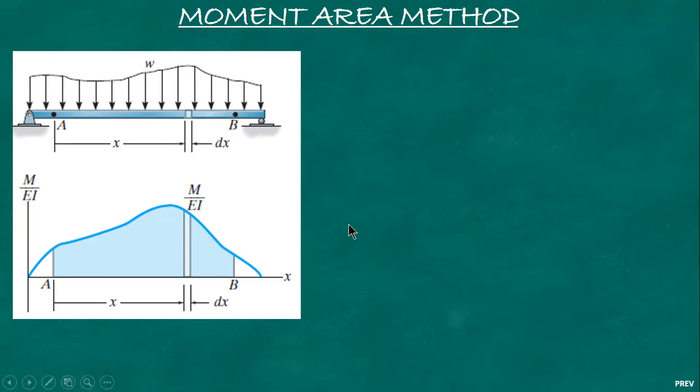So from the derivation of the flexure formula, we obtain the moment curvature relationship.

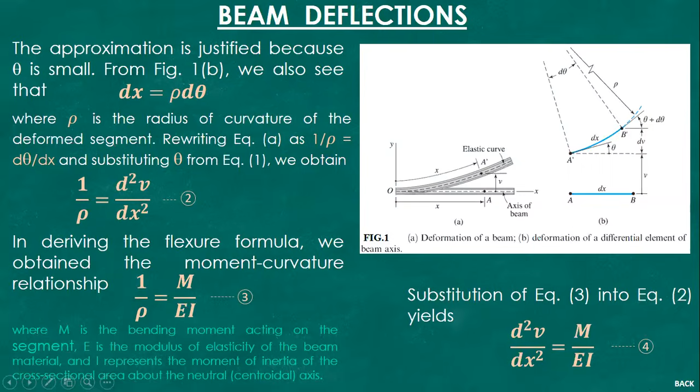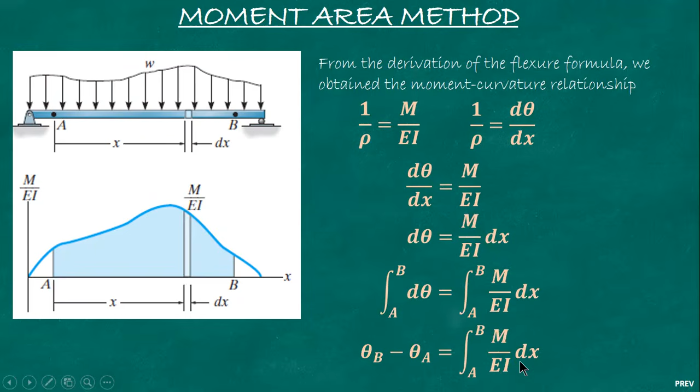Area, right? That's y dx. So integrate from A to B. Theta B minus theta A equals integral of M over EI dx from A to B.

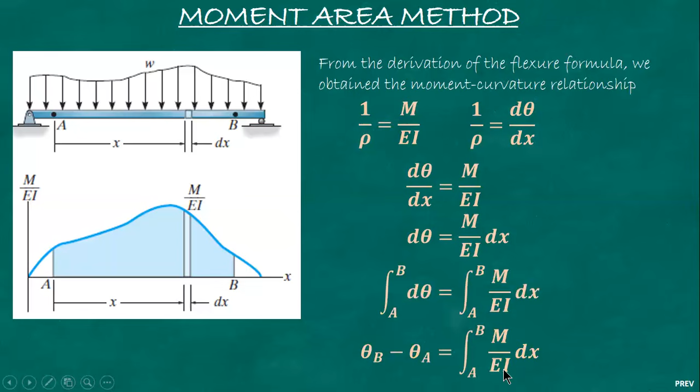So that's theorem 1: the change in slope between any two points on the elastic curve equals the area of the M over EI diagram between these two points.

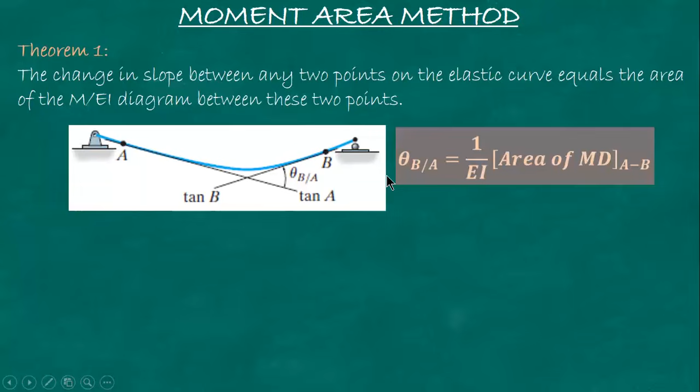So this is the notation: theta B/A equals 1 over EI times the area of the moment diagram between A and B.

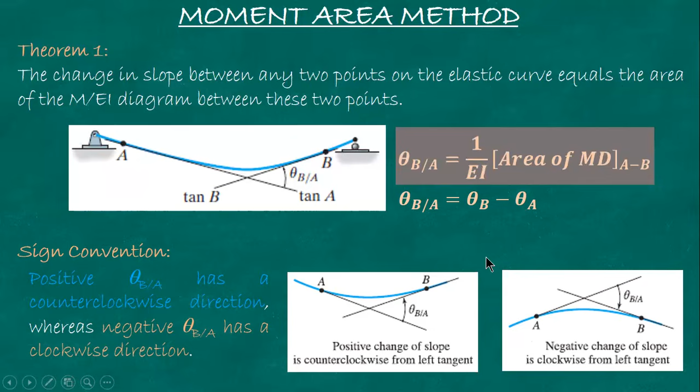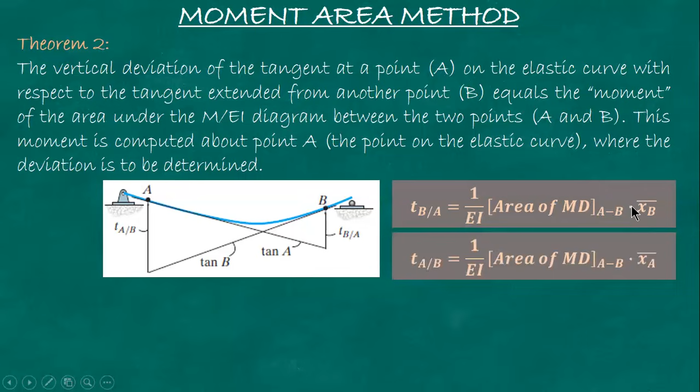Sign convention: the tangential deviation tB/A is positive if B lies above the tangent line. Pareha ni ba? Kini naa sa ibabaw sa tangent line, positive na siya. And then negative if B lies below the tangent line. Positive ni siya kay ang B mas ibabaw sa tangent line. Negative pag B is below the reference tangent.

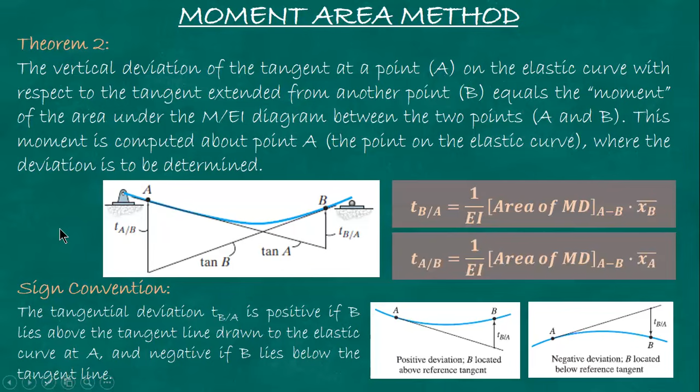So inani siya. Application of the moment area theorems is practical only if the area under the bending moment diagram and its first moment, meaning area times distance, can be calculated without difficulty. Mao na siya. Kung ang paggamit sa moment area theorem, dali lang, only if ang area can be calculated without difficulty. Pag triangle lang, rectangle, dali ra na siya. Pero pag parabolic na, diyan na dahin ka.

So the key to simplifying the computation is to divide the bending moment diagram into simple geometric shapes, rectangles, triangles, parabolic spandrel, and parabolic segment that have known areas. Kabalo naman ta sa mga area and also centroidal coordinates. Naa may given nga mga values.

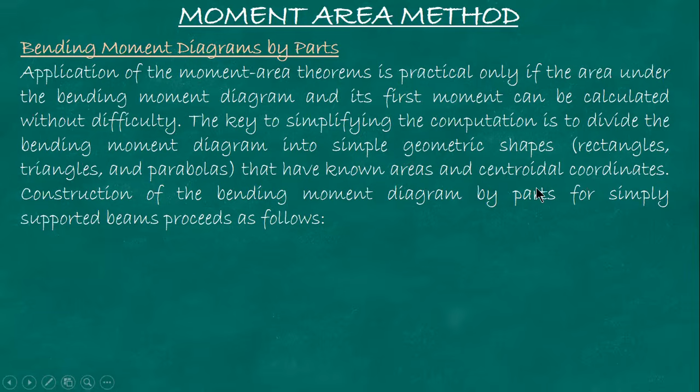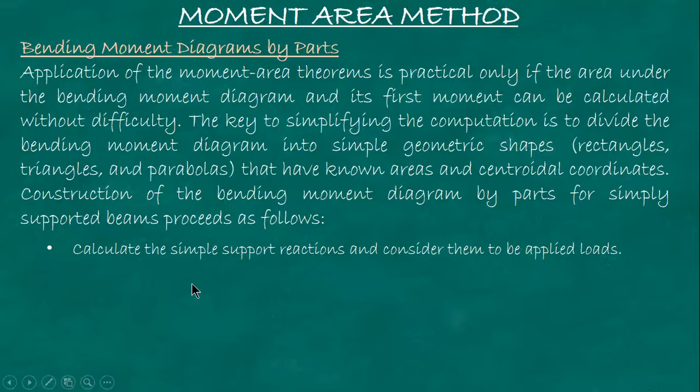Okay. Construction of the bending moment diagram by parts for simply supported beams proceeds as follows. So, naay diagram diri para ipakita. So, first nga buhaton nimo, given ang beam, calculate the reactions and consider them to be applied loads. So make sure nga correct ang reactions.

Okay. And then number two, introduce a fixed support at a convenient location. Mangita ka og point nga himuon nimong fixed. So a simple support of the original beam, left or right, is usually a good choice. But sometimes, another point is more convenient. The beam is now cantilevered from the support. Cantilever na kay fixed. But sometimes another point is more convenient, naa somewhere sa middle. Ako i-explain.

And then after this, pag maka-introduce na ka og fixed support, you draw a bending moment diagram for each load. Bali, kada load sa beam nimo, buhatan nimo og separate na moment diagram. I-consider ni mga cantilever kada isa. Kada load, di ba? So you draw the bending moment diagram for each load, including the support reactions.

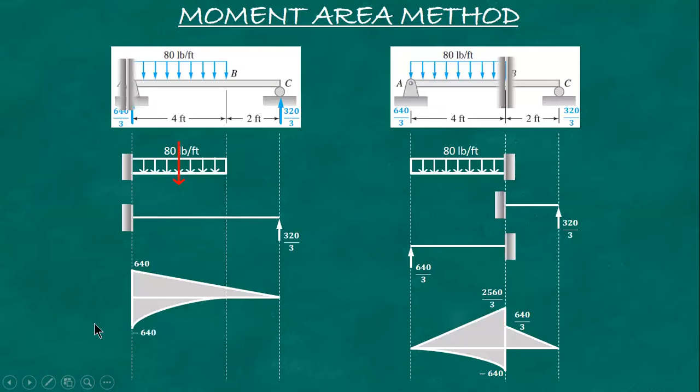So you have to master this one. Moment diagram by parts. Sige. Let us solve a sample problem para ma-apply na to.

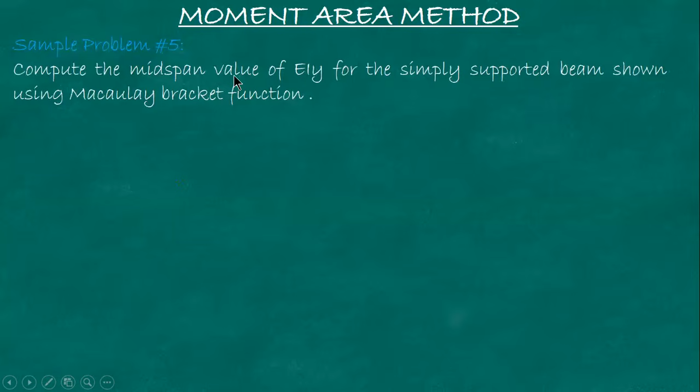Ay, wala ma-edit oh. Compute the midspan value of EIY for the simply supported beam shown using moment area method. Sorry. Moment area method. Okay. First, you solve for the reaction. Summation the moment sa A, ma-solve ni mo ang RD. Basic lang, RD times 9 minus 100 times 2 minus 80 times 6.

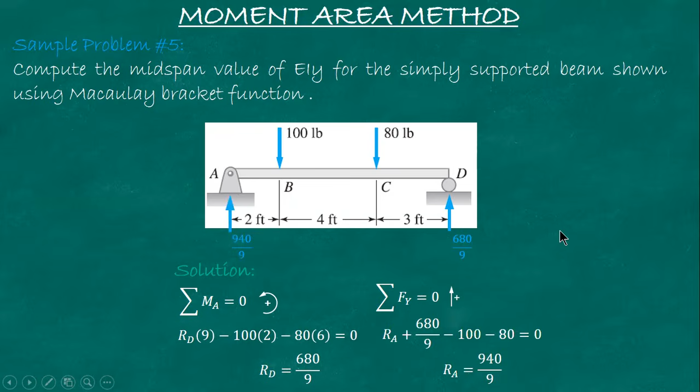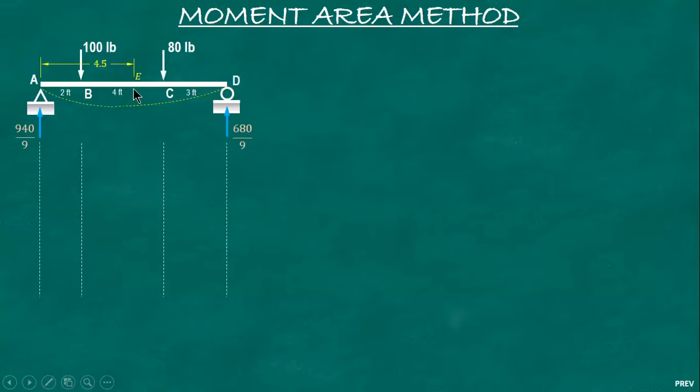Itong RD. And then summation of force along the vertical. RA, yung muna itong RA. 940 over 9. So, muna itong beam karon. And then, let's draw the elastic curve. Now, what is asked is deflection sa midspan. Diba? Again, compute the midspan value of EIY.

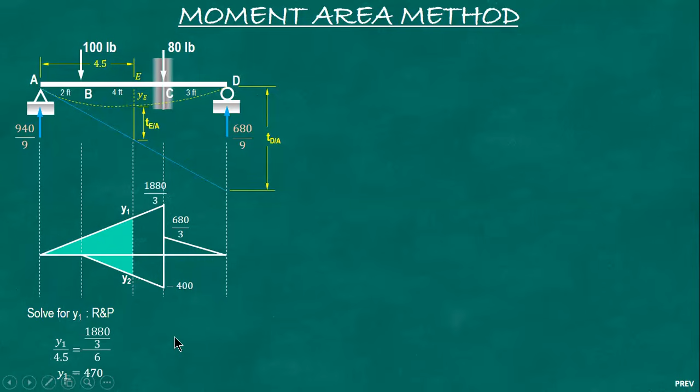Y1 over 4.5 and then 1880 over 3 over 6. Y1 is 470. For Y2, Y2 over 2.5, since 4.5 minus 2, so 2.5. And then 400 over 4. Y2 is negative 250. Okay.

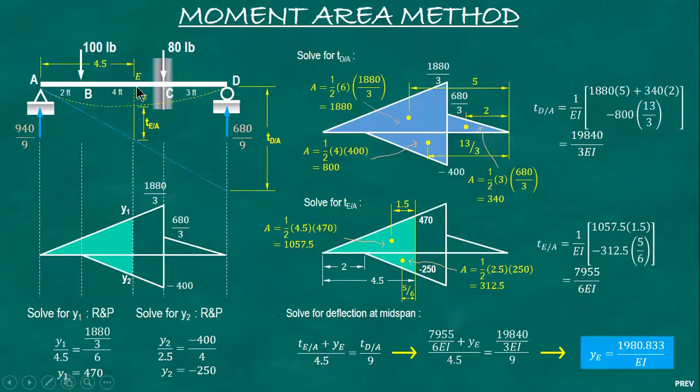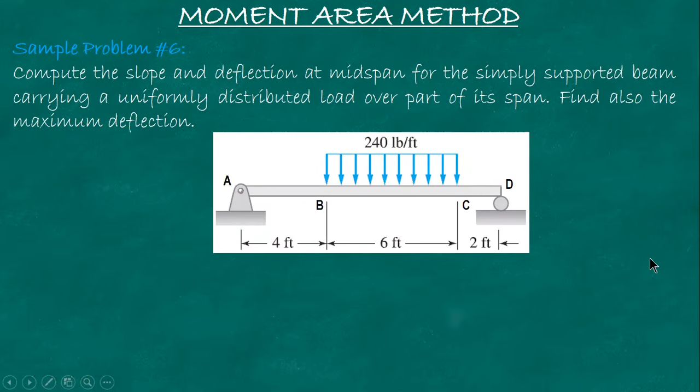Okay. The other problem is this. Compute the slope and deflection at midspan for the simply supported beam carrying a uniformly distributed load over part of its span. Find also the maximum deflection. So slope and deflection at midspan and then maximum deflection. Okay. So we already solved it using double integration method. So again, let's check if the result is the same.

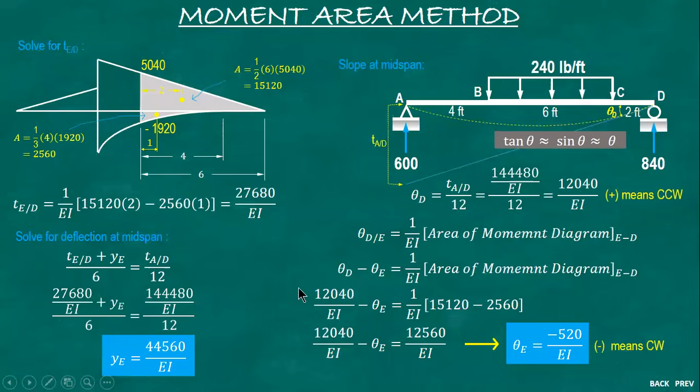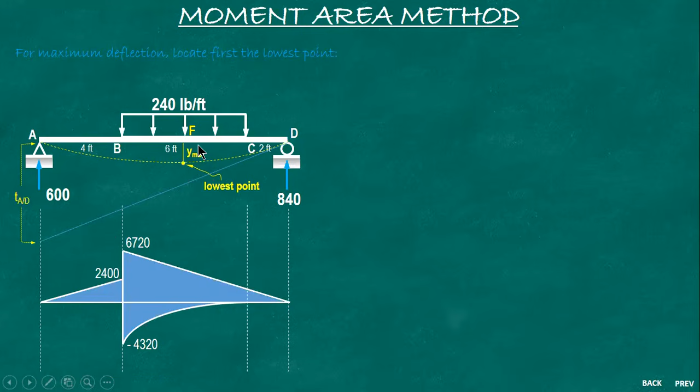Lastly, for maximum deflection, you have to first locate the lowest point, same as in the previous method. You can't get maximum deflection without first locating the lowest point. So we use the delta tangent from before, then draw the diagram. Assuming we found the lowest point, let's denote it as y max, point F. To stay consistent with the previous method, we will refer it to x, so we can compare results.

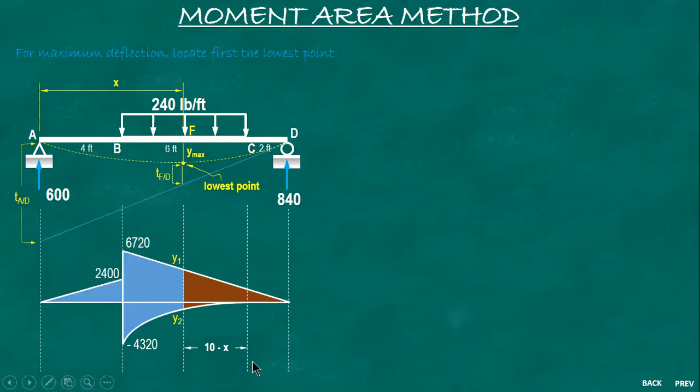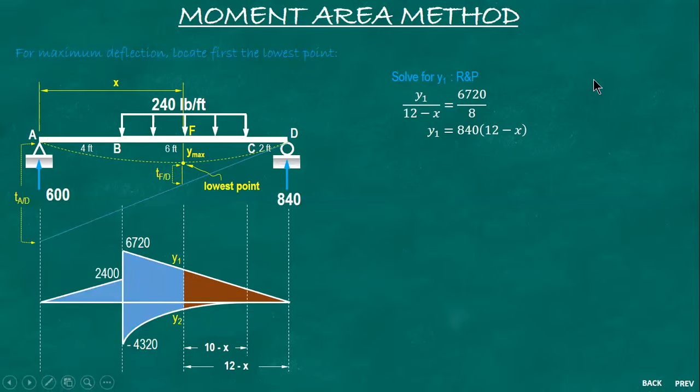We need values for our ratio and proportion - vertical over horizontal. We get the area, then the distances: 10 minus x (since 4 plus 6 equals 10), so 10 minus x, 10 minus x, and 12 minus x for the other one. For y1, using ratio and proportion: y1 is to 12 minus x as 6720 is to 8. That gives us y1. Then y2 uses the square property of the parabola.

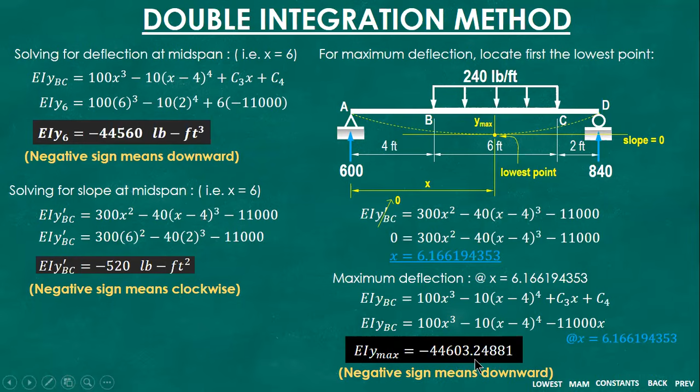Then substitute to get y max: 44,603.24881. That's it - the maximum deflection.